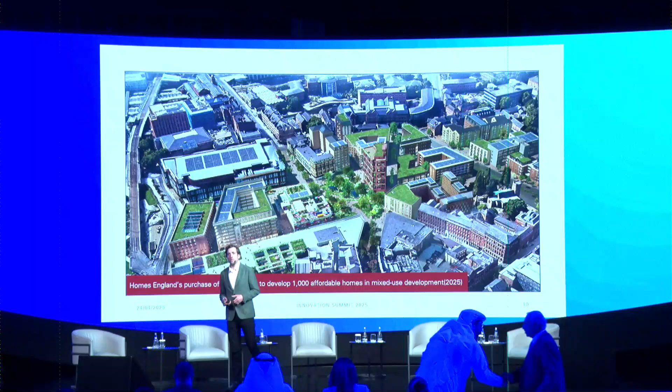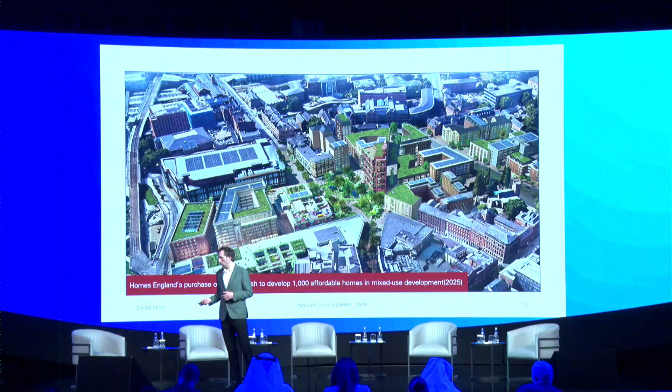So now Homes England basically bought up that land to provide 1,000 social housing units right in the center of the city, at the entrance where the main station is. So quite a controversial project, quite interesting, however, in the sense of the reflection of where we are right now in the UK. The downtowns are in that situation. We have rising demand in affordable housing, and at the same time, downtowns which became quite difficult to develop.

So when we look at sustainable communities, what are sustainable communities? From an ecological, environmental standpoint, we want to reduce car dependency and commuting. So it is, of course, about transit-oriented development, but as well short distances, paths between homes and workplaces, public transit stops possibly, and of course all the different services, schools, and so on.

At the same time, we want mixed communities. We don't only want low income, we want a mix. And London, for example, was very successful in integrating various social housing incentives and also having various families with different backgrounds living quite in proximity.

There are ways to do that, and I think it's important not to have monotypological, massive-scale interventions for just one particular income group. So it is about diversity. And at the same time, it is about up-leveling public spaces, shared spaces, creating neighborhoods, because we lost these neighborhoods as typologies in that formation.

When we have again the dwelling, the neighborhood, the district, we also create a connection between people living and having a center, a shared place, where they can create again a marketplace, because this is also going lost, and this has created Western consumerism and consumption societies where production is not part of our daily lives anymore. So looking at the history of downtown developments in the Gulf region, we can distinguish four main phases.

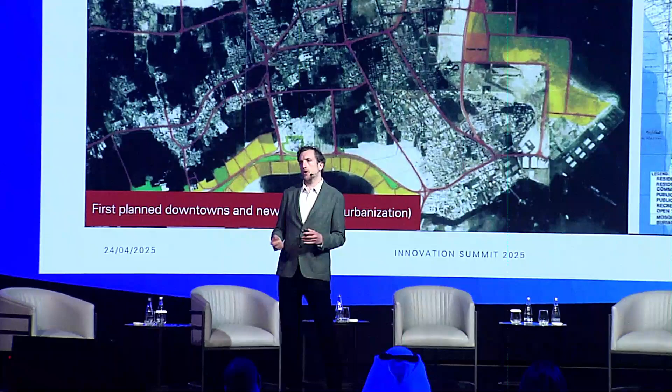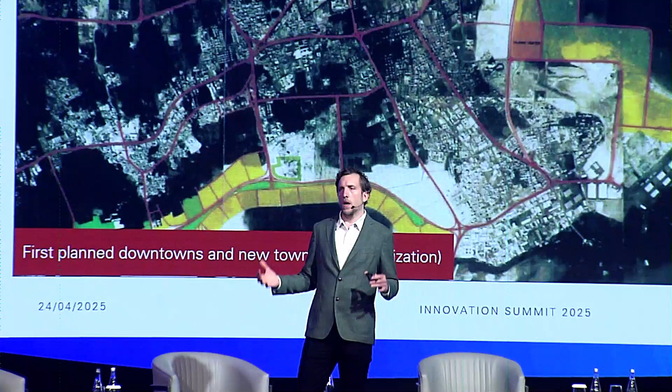So when modernization started, land reclamation started in the Kingdom of Bahrain. At the same time, the new highways enabled suburban living, different kinds of living forms, modern living forms. And that is, of course, completely understandable. This modern urbanization, electricity, water, and AC have had a massive impact on lifestyles and urbanism.

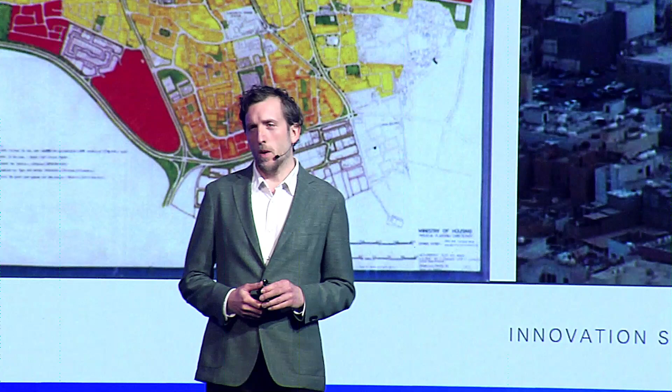At the same time, the business district was zoned along the northern shoreline of Manama towards the international airport in Muharraq, and we have the first master plans of Hamad Town in the 80s being developed. In the 80s, we also had the arrival of banking, also international regional banking, which was a big driver in the economic diversification of the Kingdom of Bahrain. And the business district was more and more defined along the shoreline, with the entrance to the traditional settlement at Bab al-Bahrain. However, the south was purely residentially zoned, with neighborhoods and districts set up to be developed.

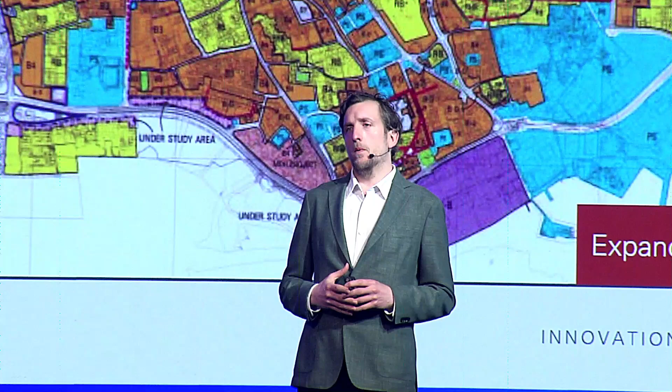What, however, happened in the 2000s was the opening up of so-called investment zoning. And the investment zoning, as you can see here in orange with BA and BB, enabled commercial and residential developments depending on market needs, the moment the Kingdom of Bahrain also opened up for freehold property markets, for big mega projects and developments, creating this new skyline.

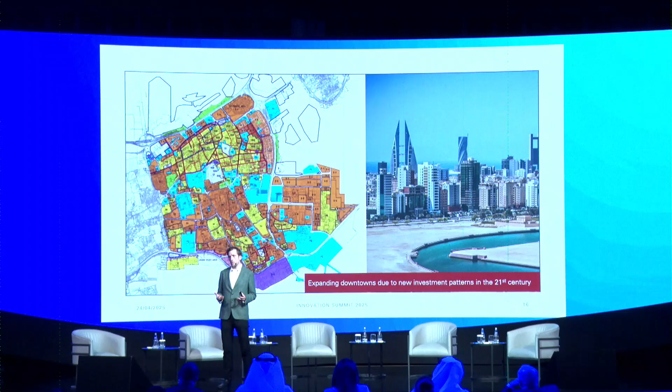At the same time, we have a lot of need for other kinds of housing typologies, for all the guest workers coming into the country, developing this construction boom in all different areas. At the same time, we also had much bigger demand in offices, for example, for all these different companies arriving. And that meant that the downtown, the business district, was not contained anymore.

So it spread, it basically fragmented the southern area with various different areas, and that is very typical in Gulf cities, creating key challenges now. The downtown is much bigger now. So as it got bigger from the souk to the CBD, it got also much bigger and much more sprawling in the last 20 years.

If you look at downtown areas, downtowns are always expanding, of course, with population size. So when we have now over one million inhabitants on the islands of Bahrain, this is of course the case here as well. So we have a problem often with this fragmentation and fast growth, that there's missing integration, especially if it is not transit-led—so not led by public transportation, but by car. And you can imagine you have to invest somewhere where you still have infrastructure and access and where you can park.

So this is a natural process of fragmentation because it is car-based. At the same time, this lack of infrastructural capacities and incremental development led also to some areas deteriorating, becoming underutilized. We can say that land prices are quite high because they are central, and at the same time we have this underutilization of land, of the return of that land. The same is actually happening in other cities worldwide.

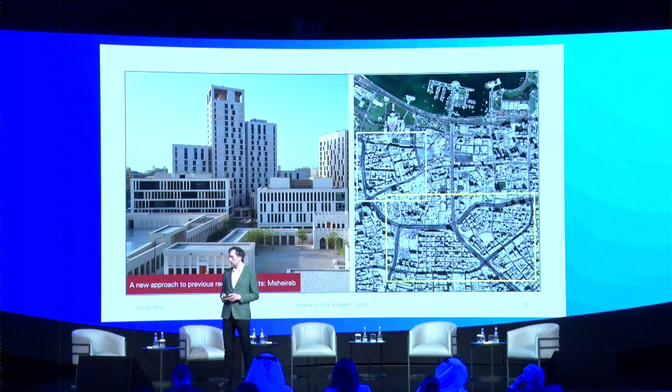So we have high build densities, but not the high population densities. The population densities were much higher in zone 15 and 16. Looking at the area and the history of that area, it was desert in the 50s, but it became part of the suburbs for Qatari housing in the 1960s. And with people moving from countryside to the city, to Doha, they were used to a certain vernacular way of living with courtyards.

So they were actually in the 1960s still building the vernacular style of housing with courtyards connected with that density. But in the 70s, housing programs by the government of Qatar enabled this population to move into the outskirts. This led to the starting point of renting these dwellings to guest laborers, first families, and in the last 20 to 30 years to a transient, mainly male labor migrant community living in this area, in quite high densities, and also because there's hardly any investment getting into that building stock, with very difficult situations infrastructurally, utility-wise, and so on.

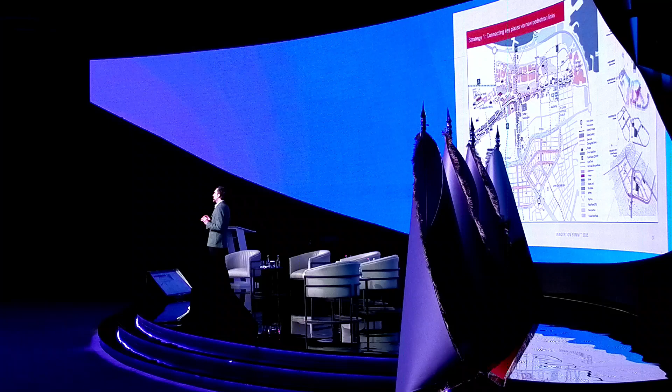So looking at the area and the plan, the first thing we did was trying to connect it to the national planning framework to connect places. This is the first thing you always try to start with: how can we activate the area by better connection, by better linkage?

We knew that the metro station in the south is under construction, so we had that big opportunity here coming in for transit-oriented development.

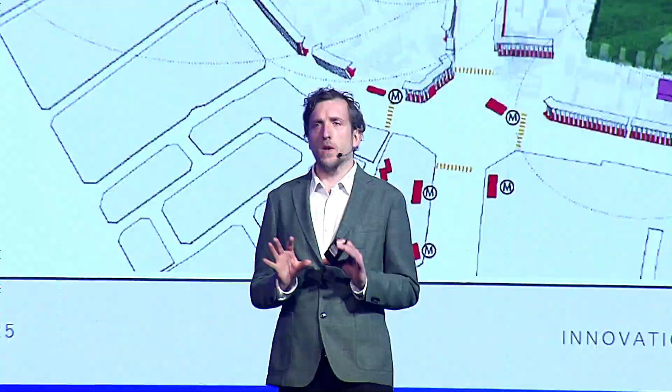The next step is, of course, an open space strategy, trying to create open spaces and green spaces in certain areas, in order to foster walkability and promote walking to train stations and so on.

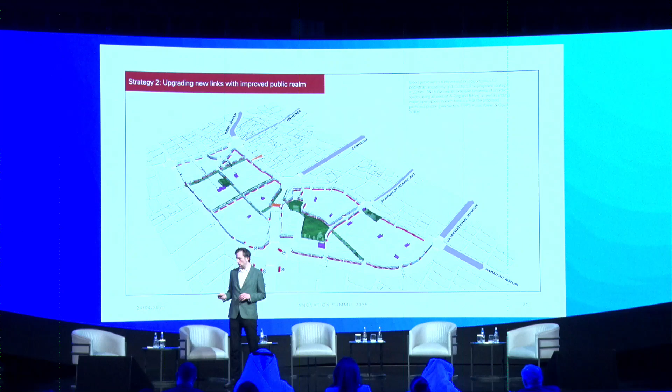The next step, we worked with the Qatar Museum Authority in saving certain building stock, like historical building stock, even though built in the 60s. There's still a narrative, still a story here on the site, which shouldn't just be replaced because it's still part of the whole legacy of these districts, and they can be renewed, recovered, and integrated.

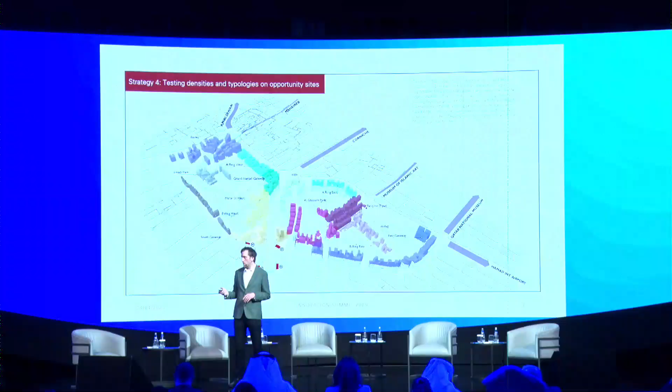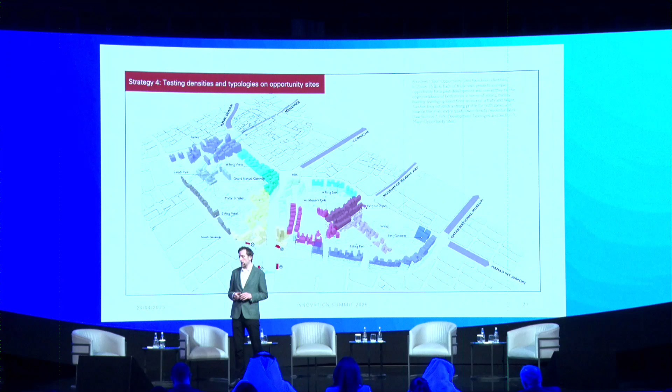Looking further, we were of course in that situation that a lot of investment interest is still there in the area, especially with the metro station coming in. So certain opportunity sites we had to look at, in order to create denser areas with mixed-use approaches, but also mainly residential, in order to build up these other kinds of areas while also negotiating and integrating the older building stock.

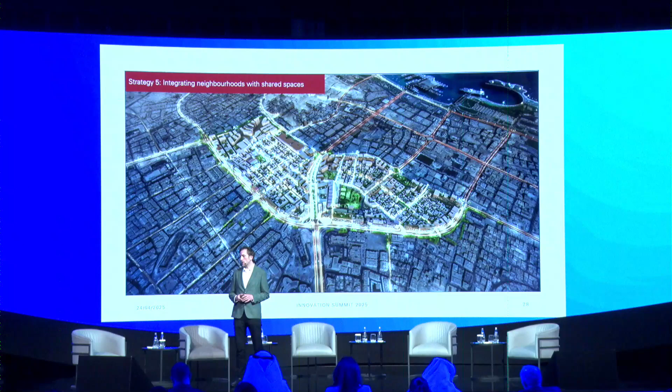So all this is, of course, translated then into certain typologies and also how the typologies can work to have higher, medium, and low buildings, and that negotiation between the different building heights.

Then, of course, you show the before and after situations in order to try to create joint ventures between the different landowners. This is the most difficult part, because these landowners, to a large extent, are not connected. So they also have to get to know each other, build relationships, and build faith in the whole project.

So the government only was ready to build the public spaces, the connection points, and certain infrastructure. But the private sector had to come together, and still has to come together in large parts, to build these joint ventures - for example, the entrance situation, but also the townscape in general. All these opportunity sites need a lot of communication between all the different stakeholders.

So the insight is also about creating this more traditional way of living, and I'm very happy to see here with Muharraq, with the project in Muharraq, also showcasing that native living, back to the roots, back to urban living, can happen and can be a very qualitative way of life.

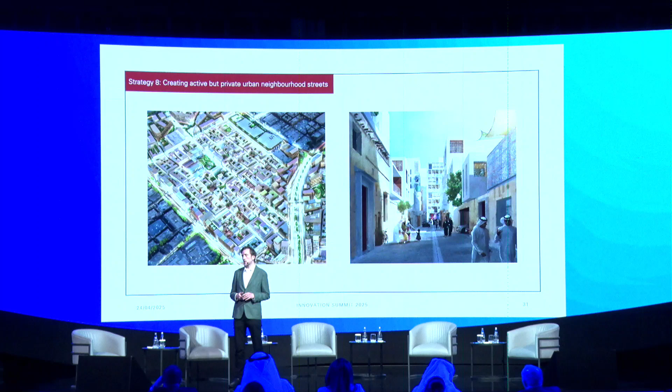So this is also something we wanted to promote in Qatar with various studies and these illustrations.

So the key takeaways: it's all about communication and building relationships, and that's the most difficult part, because for a long time there was always this relationship to land in the sense of revenue, rather than understanding that quality has to be co-created. Yeah, so that's what we also discussed yesterday.

So the shared public realm is something we can only create when we connect buildings, but not by seeing every piece of land in our own portfolio as disconnected.

At the same time, we have to create this connection also for economic diversification, because in all our studies we show - and this is why London and other places are so successful - if you want creative industries emerging, and you want that diversification, giving young people ownership of a rising economy, you need the space for it. You need these small little places where offices can emerge.

In London, you will see architectural firms on street side where previous shops were. So you suddenly have a very different language of co-working spaces and so on, co-creating these industries, and these are things which are desperately needed in the future.

So we're talking about, of course, a long projection of 20 years. This is not a project which is going to be built over the next few years, as Msheireb - it's a long-term goal project.

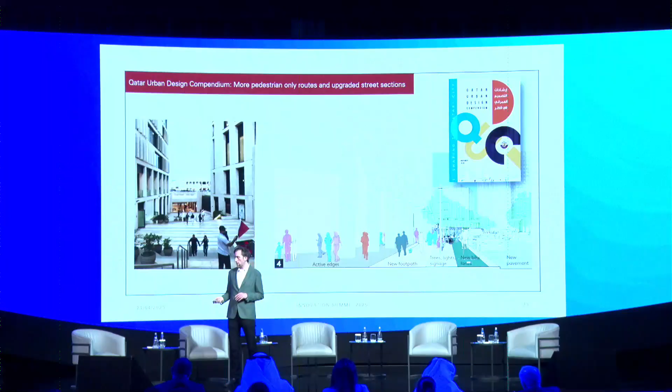This project led then also to be commissioned for the Qatar Urban Design Compendium. So we also worked again with Makower Architects on this coding, looking at regulations out of all the studies we did, for the whole of Qatar, to certain kinds of standards, also new typologies and climatic responses of how downtown living is possible in new shapes and forms.

So the call to action is, of course, based on these kinds of results, looking at typology studies, and understanding more that creating small enterprises and incentives needs space, needs downtowns, needs these social interactions and points.

Once you are in the outskirts and you have a consumerist life, as myself also at the moment, I have that in Nottingham, we often don't co-create anymore so much. We don't go into these entrepreneurial relationships as much because our social interaction is shrinking. So we have to rediscover this, and we also rediscover new tools.

At the moment, we are working on a site, Island Quarter in Nottingham, also with Space Syntax. This is owned by an American landowner, and the land speculation has been going on for a very long time, so the whole area is stuck. We are all in the same boat here across countries, and everywhere we have the same issue. So we are looking here in that situation.

Again, it's very high land prices, so the densities have to go up. They are suggesting at least 1,600 housing units. So we are basically trying to negotiate different typologies.

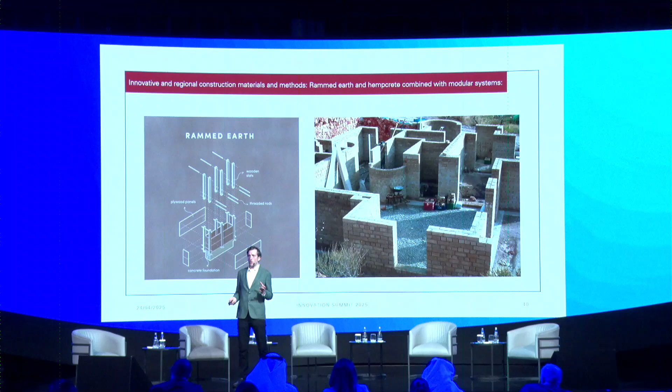Modular design, another aspect. One thing I would also like to stress, because we're exploring a lot in Germany right now, in Berlin, with the new cooperative model. Cooperatives are opportunities for not being a tenant and having this landlord situation, and also not being an owner, property owner, but to actually go into a joint venture in a cooperative where you build housing together. This is quite successful, but it needs, of course, a lot of contractual setting up.

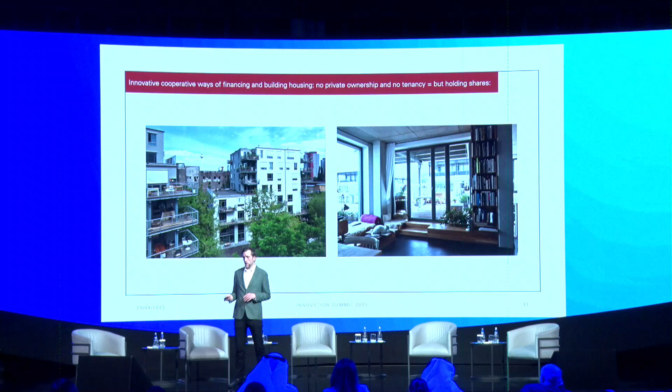So I would like to end with the keynote with a quote from Martin Heidegger, the German philosopher: dwelling is not simply about inhabiting a physical space, but about the way we relate to our world, including our relationships with nature, culture, and others. So thank you very much for listening.

Are there any questions? No? Are there?

Thank you very much for your interesting lecture regarding the urban renewal of several cities at the Arabian Gulf. Actually, our urban renewal program here.

First, if you allow me, I will introduce myself. My name is Faik Al-Mandil. I was the former urban planning undersecretary, and right now I'm a consultant in the same field. I got my diploma in urban design from the same university you got it, Nottingham Institute of Planning.